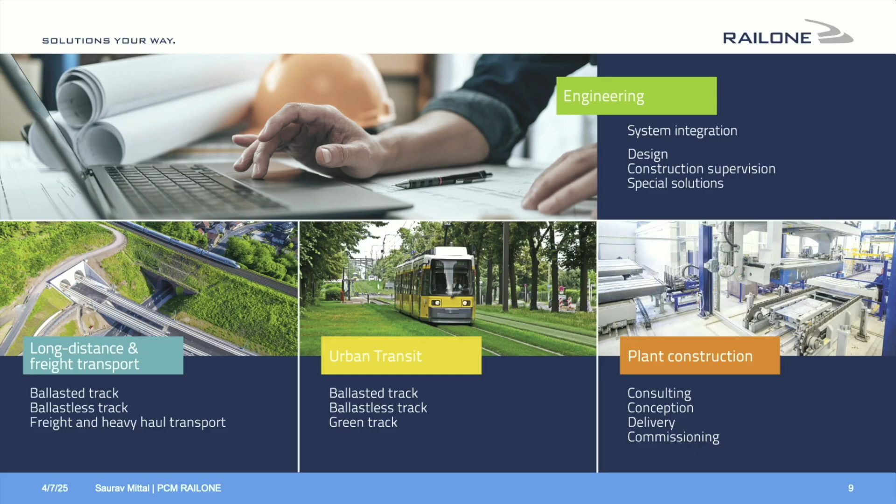We do it all - plant construction. We are the only ones in the world right now to hold the patent for an Industry 4.0 carousel production system, which we are very interested in bringing to America given the size of this market and the requirements.

Type of concrete ties, like for example what we have for America - it's a heavy haul tie, which we have supplied more than 1 million ties to UP as of now. We work closely with CN. We are setting up a new production plant in Canada by the end of this year, which we've thankfully been working on for the last 4 years, but given the tariff situation, that helps us quite a bit.

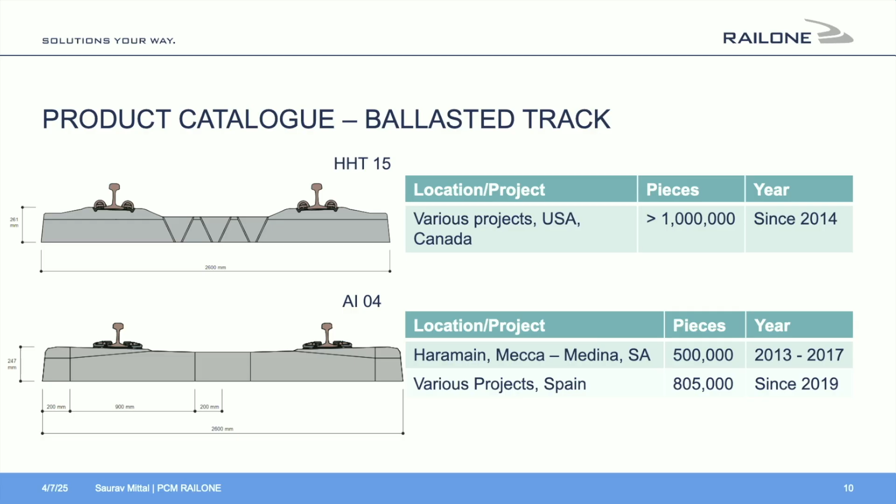We are also participating in high-speed projects on the West Coast, for which we have a tie design - it's a Spanish tie design which can accommodate speeds up to 220 miles per hour. We have tendered this design for the California project and the Brightline West.

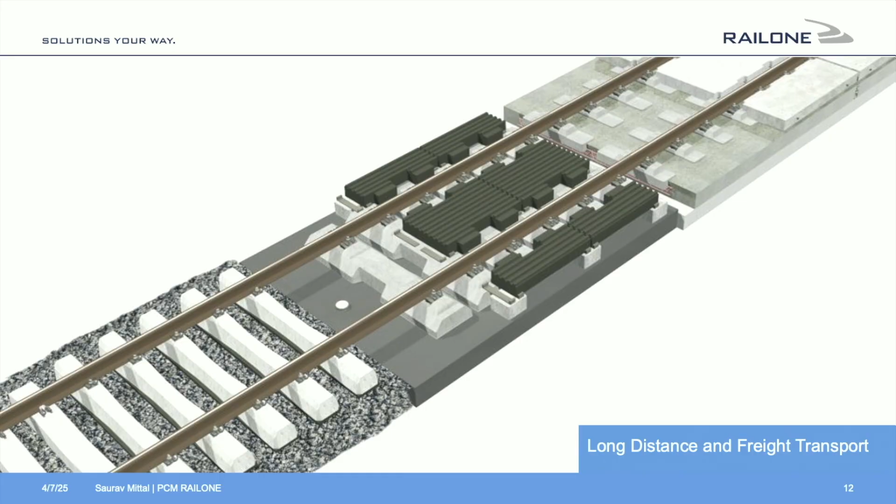These are the ones which we have for transits. If you take a normal track, what we do is everything from the ties up to the slab track system. The one in the middle is what I was talking about, proposing with the nice highway system that's there in Texas - you see the base that it's asphalt. So it's practically just making a highway lane and grouting heavy sleepers onto that, and running trains at 180 miles can be done. The black thing on top of it is noise absorbers.

We are doing this in Scandinavia. We did one project with a 100-year guarantee in Sweden last year, and in Scandinavia they have made it mandatory that for all infrastructure - track or highways - they have to give a minimum 100-year guarantee on design and performance, because of maintenance and lack of people for doing maintenance, and so on.

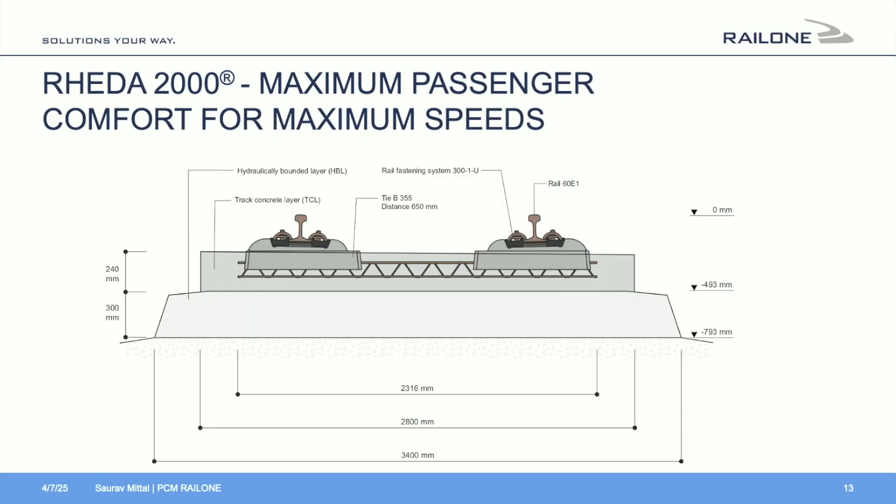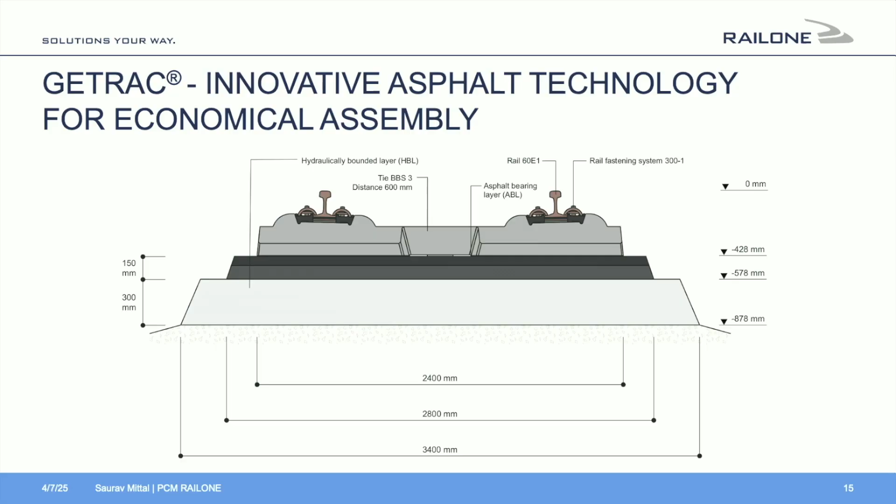The GETRAC system, what I mentioned earlier - basically it's nothing but a highway or a proper roadway, and on top of that you make these heavy sleepers and grout it onto the asphalt, and then do the final adjustment of the track. You can even use it for heavy hauls, so class 1 freight and passenger rail can both use this track technology together.

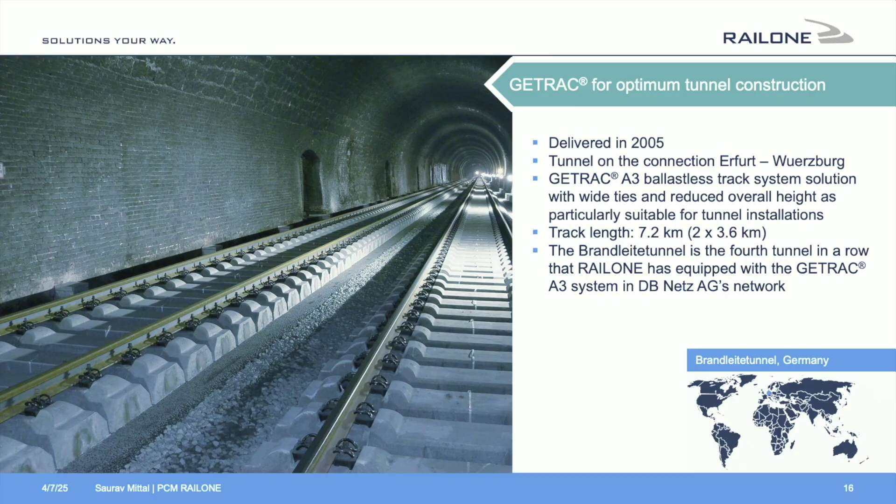We can install this slab track system - we can do almost 1,500 feet per day, and this can be done with a single team. So if a tunnel is open both sides, or if it has a double track like you see here, you can increase the efficiency to double or triple the installation capacity. And like I mentioned, we give a 100-year design and performance life on this, and you can use it for both passenger and freight.

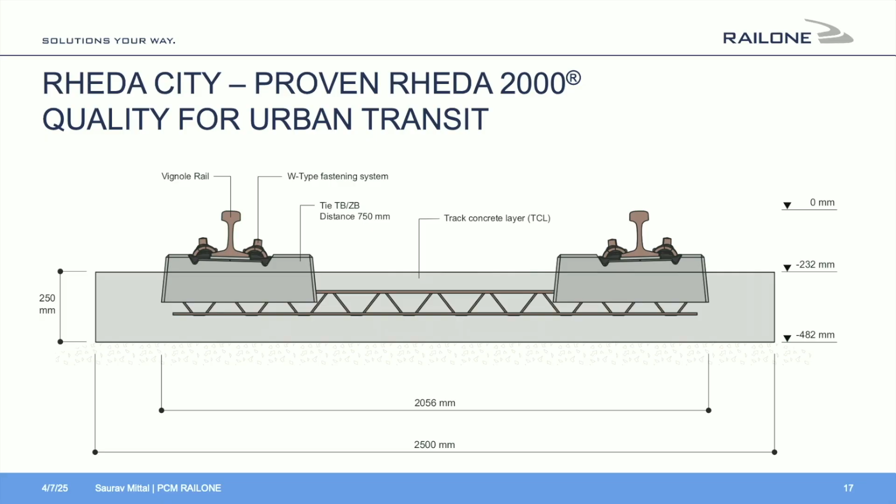Again, the light rail, this is what it looks like. In Germany, 5 of the major cities, Hanover, Munich, Berlin, Dresden, they are all based on our light rail track system as well.

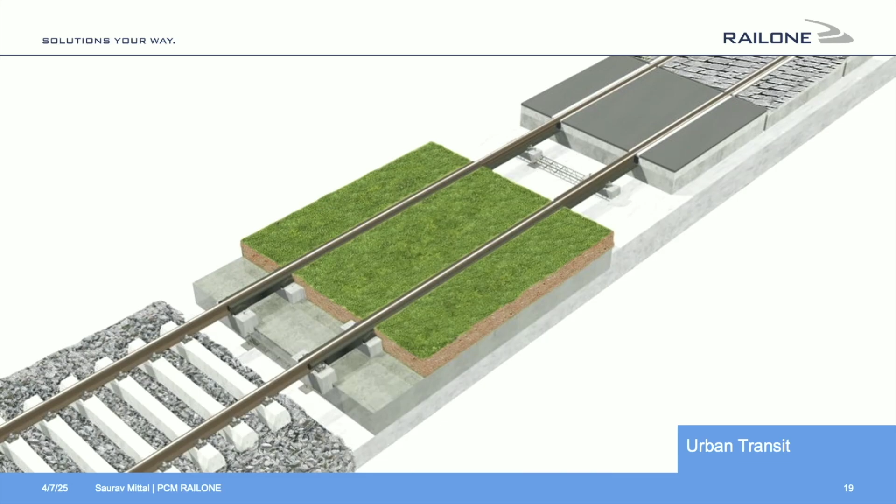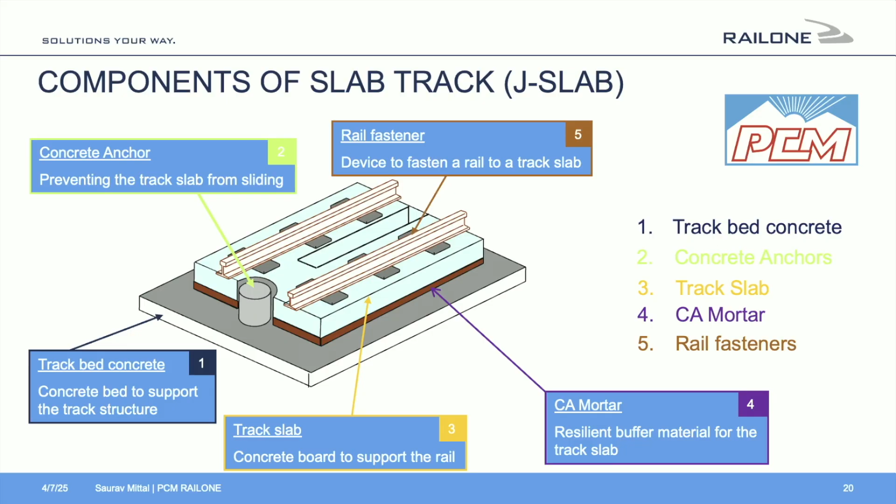Currently in India, we are also doing the first high speed rail, which is the Japanese Shinkansen system, between the cities of Mumbai and Ahmedabad. We are producing the slabs in India. Currently, we have the know-how transfer from the Japanese. Not just producing the slabs, we are also doing the installation of these slabs on the bridges for the Japanese in India. This is how it looks like.

In India and the Middle East, we are doing design and build of projects. Construction is not our forte for the North American market. We would like to empower all the good construction companies which are already here into accepting and adopting our systems to better the track systems in America.

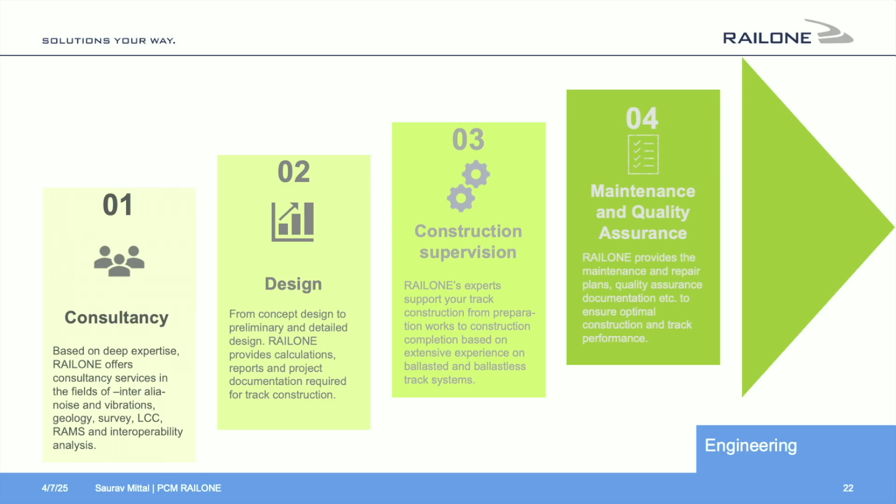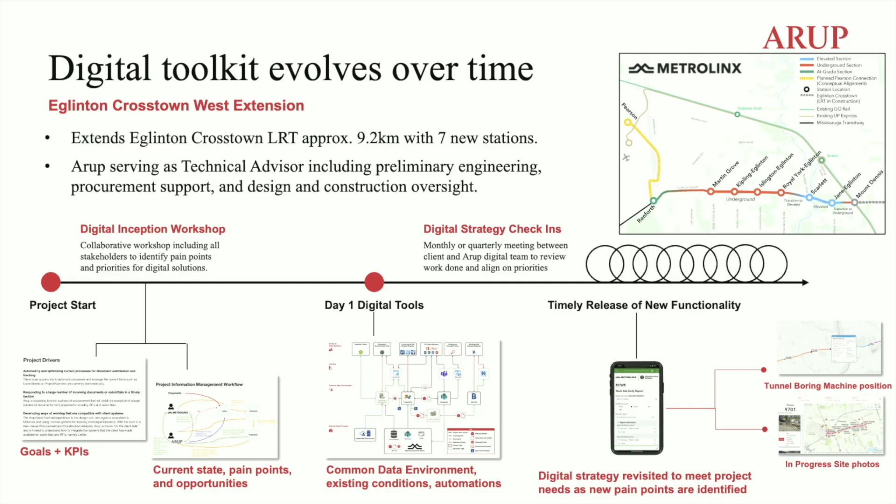So you need to be able to update with new functionality and handheld, so folks in the field can be tracking the tunnel boring machine position and reporting it out to the stakeholders.

What I wanted to talk about today is immersive experience technology. Our firm allows stakeholders to experience the project, starting with architectural renderings, going through verified photographic views, creating route animations, and actually creating audio, visual, full immersive virtual reality experiences that allow the public, project owners, and government officials to experience what the project will be like. That helps minimize project opposition and maximize project support.

As an example, on the Yonge North Subway extension, the community was very upset about the subways passing under their homes, and we needed to help our client gain project support to minimize that opposition. They were afraid the noise and vibration would really rattle them at night.

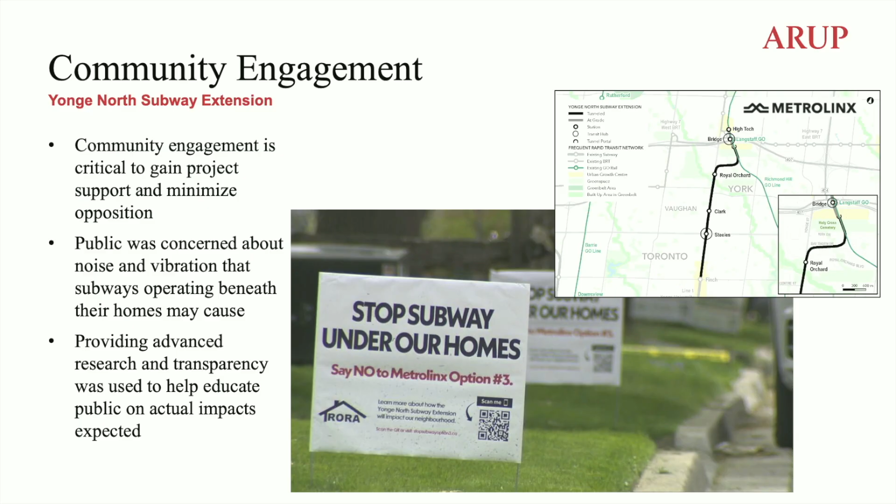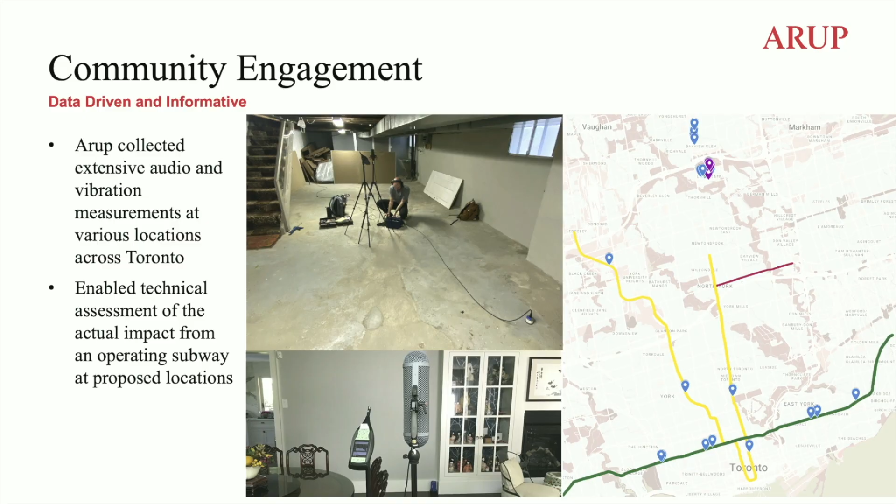So what we did is we provided advanced research and fully transparent analysis to help educate the public on the actual impacts that would be expected. We sent people out and they rented Airbnbs along the route, and they collected audio and vibration measurements in the basements, attics, and bedrooms, so they could understand what the background existing conditions were, and then technically assessed what the subway would be like operating in those environments.

By collecting data in the field on actual operating trains, on the line, and in the yards and shops, and we have high-tech stereo cameras and accurate recording equipment.

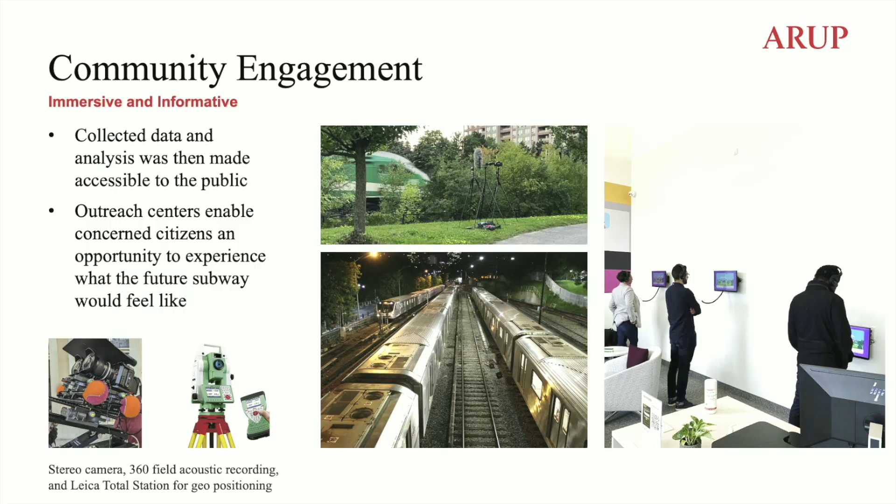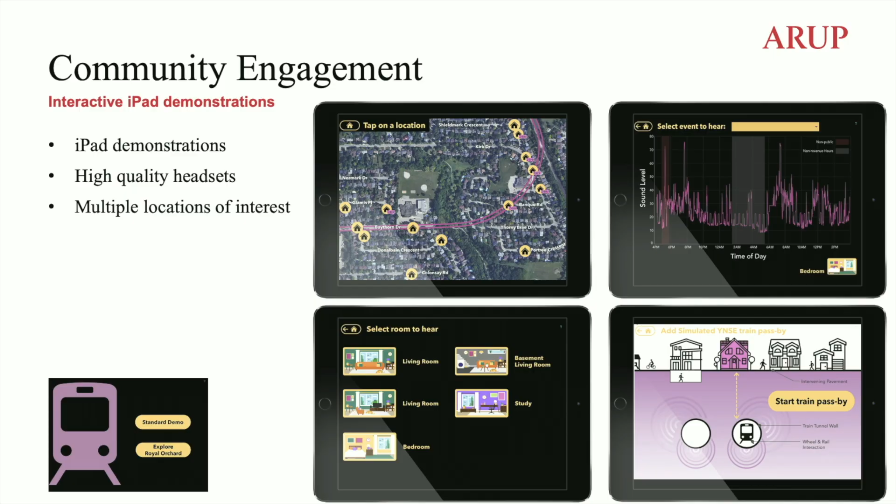And then we set up outreach centers that enabled the public to come in and, with high-quality headphones, listen to what they would experience. We had iPad demonstrations where you could pick your location closest along the route, and you could pick whether you wanted to experience the sound and the vibration. You couldn't do the vibration with the headsets, but you could hear the sound in your living room, your bedroom, or the basement.

Now, community engagement is very important. We also led engineering for Texas Central from Dallas to Houston, and education was the best way to ensure the public understood what they would be experiencing.

Colleen and I went to many public meetings with Travis, and we would hear, the train's gonna go by, it's gonna be so loud, it's gonna blow out our windows, and it's gonna go so fast, it's gonna suck all the oxygen out of the air, and my cows are gonna drop dead, right?

So we needed to try to educate them a little bit better. So we sent folks to Japan who recorded the Shinkansen, and then we sent them out in the field in Texas to record the current background freight.

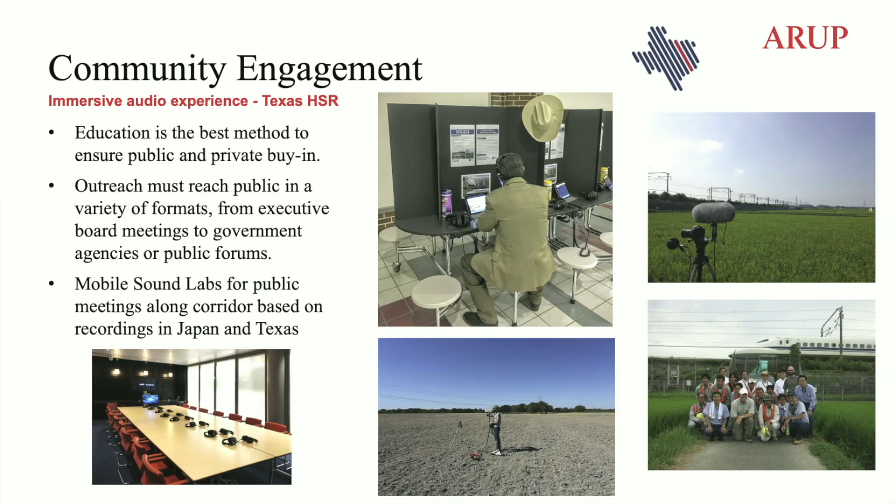And then they listened to the freight train that goes right outside their house, and it kind of woke them up that, yeah, I'm listening to that clickety-clack slow noise for 5 or 10 minutes. That really helped us resolve some of the stakeholder concerns.

Now, for High Speed 2 in London, we had advanced mobile sound and vibration labs where we brought it all together with a virtual train environment that actually had a vibration motion platform, so folks could put on virtual reality goggles and sit in a seat and actually feel the movement of the train.

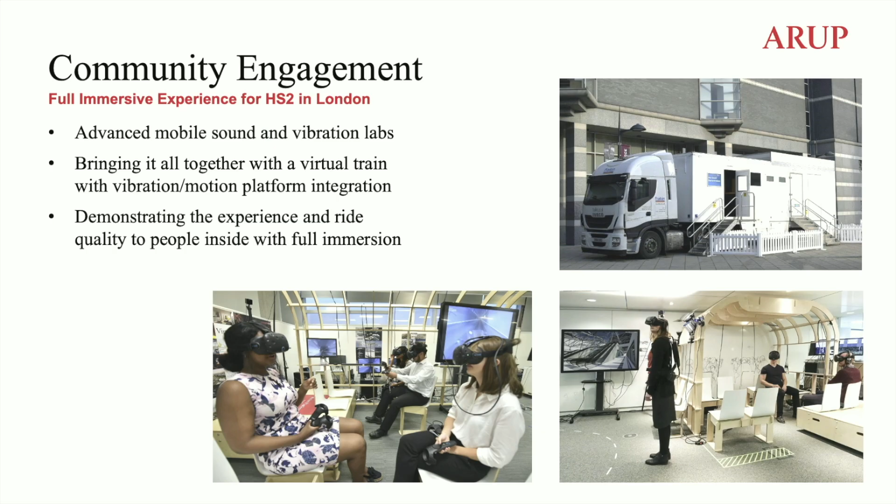And our company will actually model structural modifications to your building and let you sit in a vibration setup to feel how the structural changes would address the vibration you might feel from an adjacent highway. So I just want to give you a couple examples here.

This is a map that we put together for the public for the immersive experience. We have different locations for aerial animation, photographic views, and total immersive experiences. This was for public meetings, where they could go out and look at these different experiences.

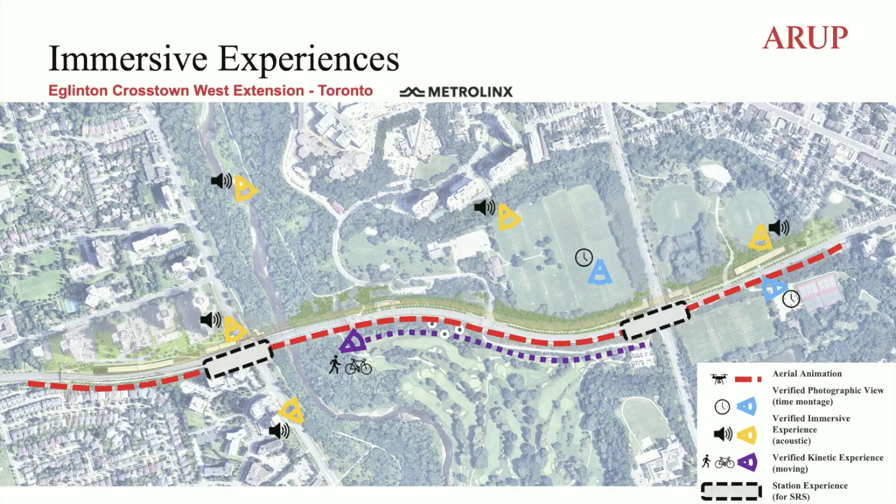In this very sensitive area, you can see there's a golf course and a couple of play fields for local schools. So I hope the video works here, but this is a visual animation from a drone flight, mapping the actual infrastructure that would be built.

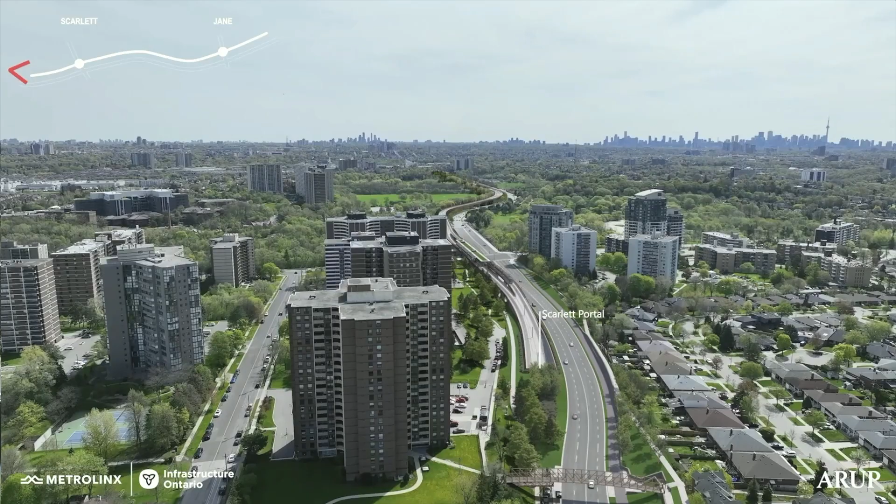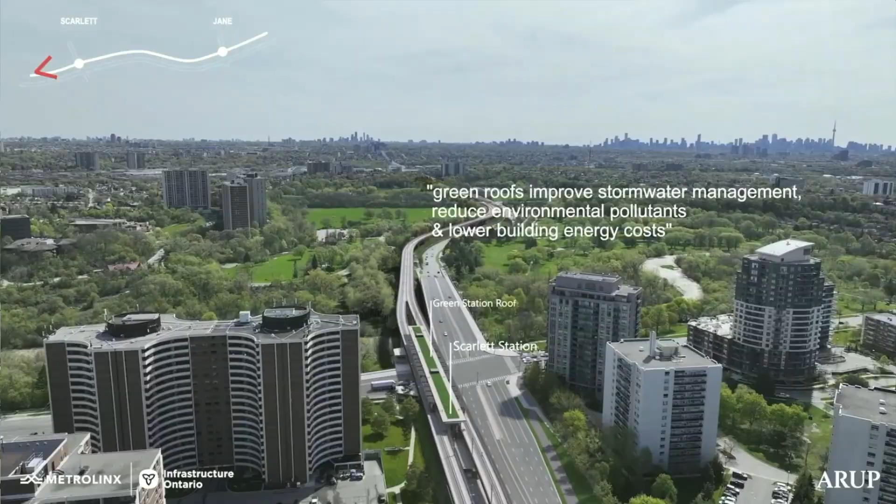No sound here, but you can see this is an actual live video by drone. You can see cars moving down the highway, and we were able to map onto it the proposed infrastructure in the future, so you could see it before and after.

We mapped it out as it passes through the park, and we could show how it affected the tree lines and how we made modifications to it.

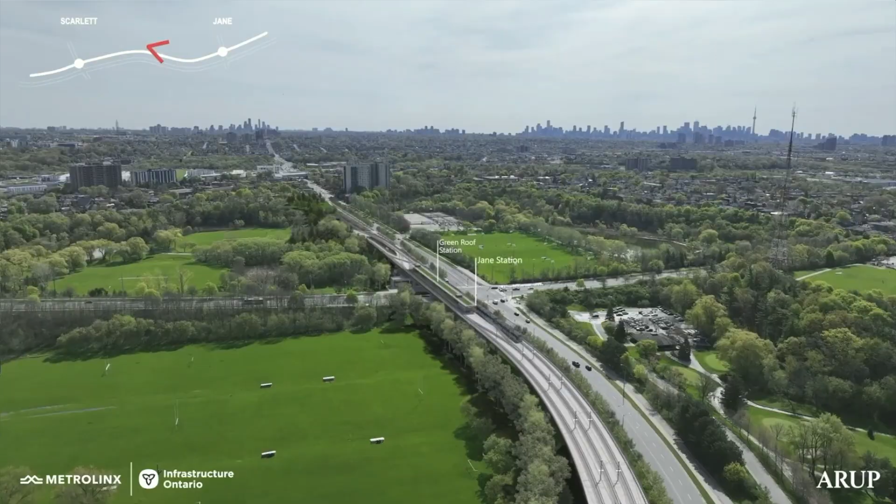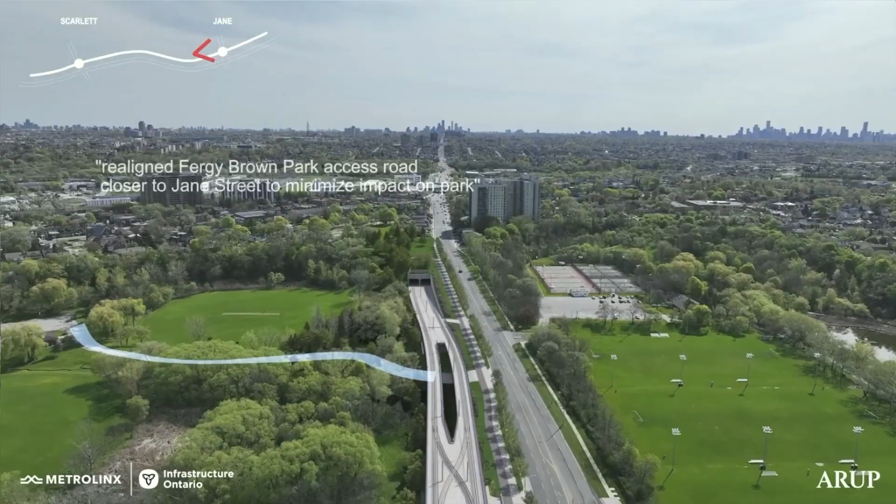This was a full 8-minute video that we can make available. It showed where cycle and pedestrian tracks were going to be and where the stations were going to be, and how access roads along the alignment would be relocated. It was very helpful for the folks to understand what they would experience when the system was ultimately built out.

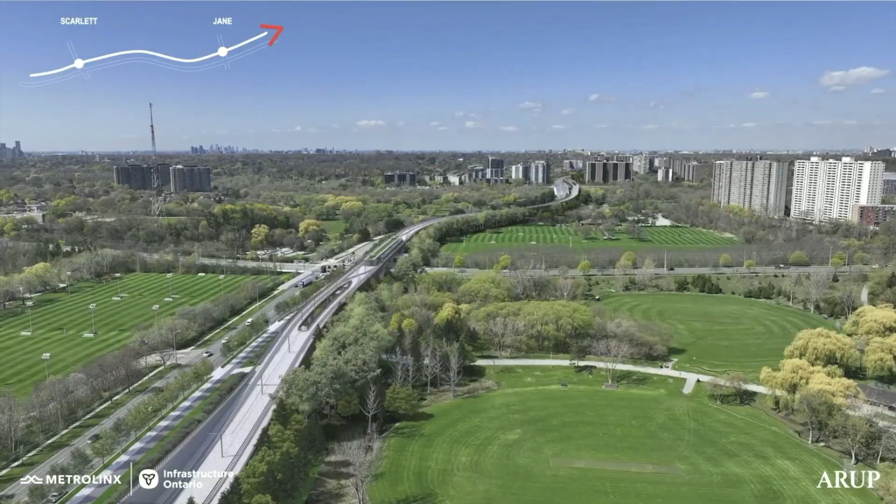My second video shows audio simulations of key points along the Eglinton line at 4 different times: today, during construction, 5 years after construction, and 30 years in the future. These were used to help the public understand. We chopped this up, but hopefully you get the effect from this video, and this has audio, hopefully.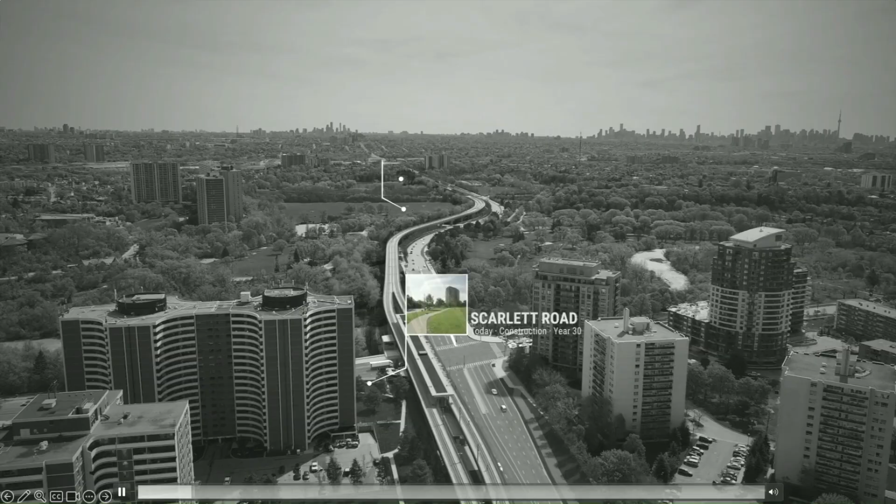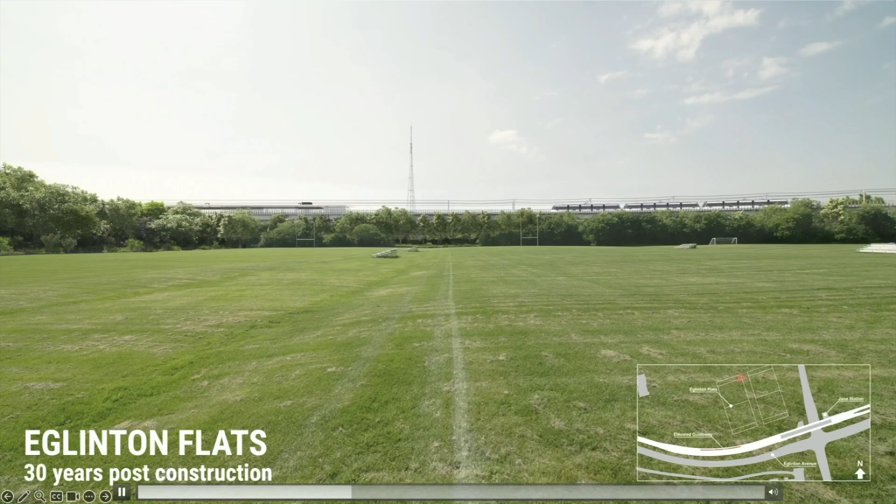You will hear the background noise, then the construction noise, then the train noise when it's implemented, at 3 locations. In the background are louder than the trains are. That's 30 years in the future. You can't see the train.

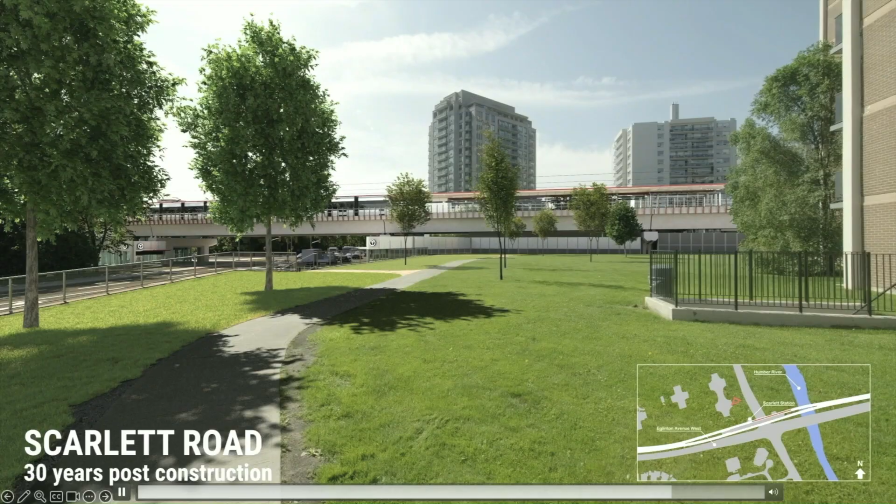As a quote there from the President and Chief Executive Officer of Metrolinx for Toronto Transit Agency, he noted that he was really impressed with the acoustics work, and mostly that the sound lab needed to be central to stakeholder engagement to try to address some of the misperceptions that people might have about future projects. Thank you for your time.

Thank you, Chris. I actually sampled that Texas Central program, it was awesome. And finally, Philip Moore from STV, going to tell us what's going on with your group. I'm going to try.

Well, that was 3 really good presentations, and as I was sitting through that, I was going, you know, sometimes you can make the joke that they save the best for last. In this case, I'm not quite sure. I don't know if my presentation is going to be quite as cool as theirs, but that's very good. And I'm going off script already, this is why we have a 10-minute time limit for guys like me. But you know, what's so cool about the rail industry is that every day is a different day. And just those 3 presentations alone, I picked something up from every single one of them.

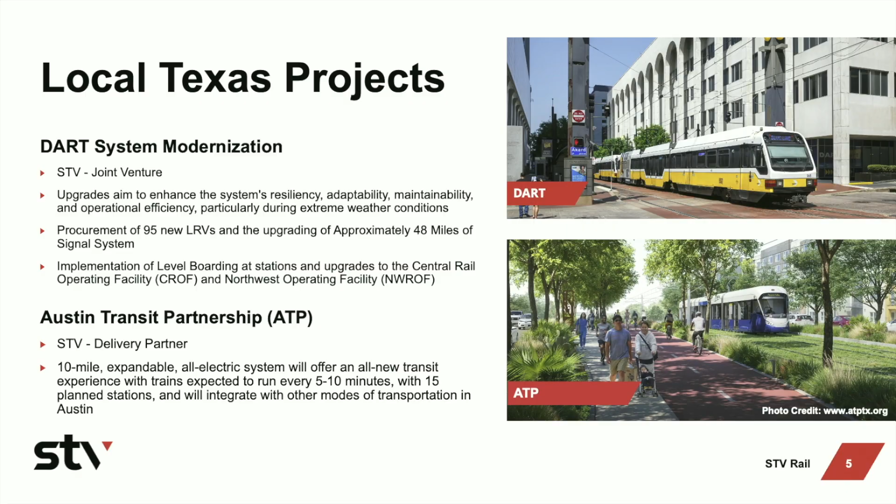I do apologize if anybody here from Houston Metro is in the room. We haven't forgotten you - we know you're our client. We're actually doing some GEC work for them currently as well, but we can only fit so many folks on the slides, so we haven't forgotten about you.

A couple national projects I wanted to highlight: the Metra Capital Program PMO, that's a $2.5 billion, 5-year capital program that we've been directly involved in. And then the SMART extension - for those who don't know, SMART is Sonoma Marin Rail, up in Northern California wine country. We've helped with a $54 million design-build project there. Just wanted to highlight a couple of our national projects - we are coast to coast, north to south, and even into Canada, as I mentioned.

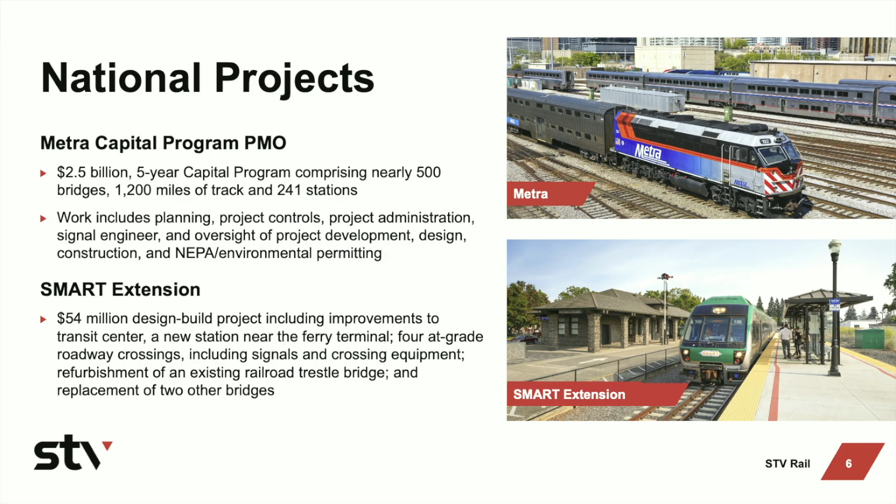Lastly, highlighting the projects - one thing I really talk to our clients and prospective clients about is the funding aspect. That's a hot topic right now, but we've got a dedicated grants advisory team that does a really great job of finding money our clients might not be aware of. We want to help you get as much money as you possibly can. We've had a couple really good wins on that.

One of them was with the FRA Railroad Crossing Elimination Program in South Carolina - we helped secure $204 million there. And then the next one was MBTA, the Draw One Bridge, where STV was instrumental in securing $472 million, which was the largest federal award in MBTA history. So we're very proud of that.